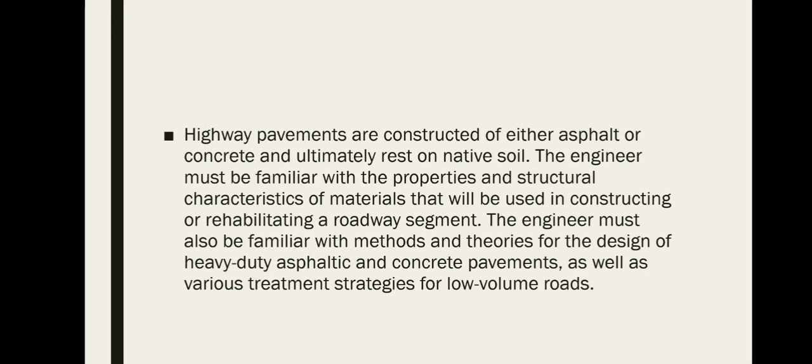Next is soil engineering for highway design. Highway engineers are interested in the basic engineering properties of soils because soils are used extensively in highway construction. Soil properties are of significant importance when a highway is to carry high traffic volumes with a large percentage of trucks. They are also important when high embankments are to be constructed and when the soil is to be strengthened and used as intermediate support for the highway pavement. Thus, several transportation agencies have developed detailed procedures for investigating soil material used in highway construction.

So in highway design, soil plays a vital role before constructing a highway pavement. Regarding soil, it's important to know its properties because there are many types of soil - loamy soil, sandy soil, or whatever type of soil - because these types of soil vary in how they are handled before going into our project.

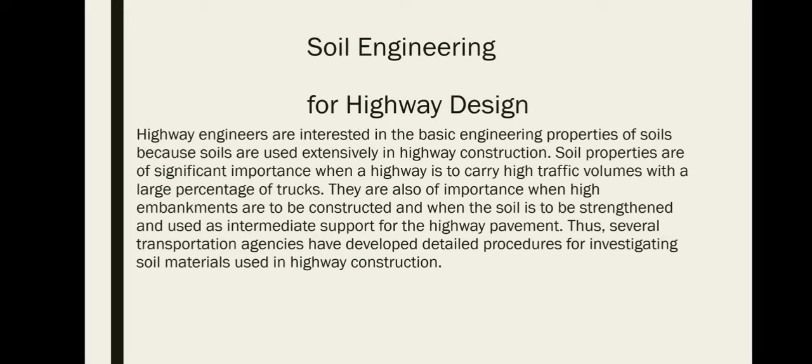Also, highway engineers need to know how to deal with different types of soil. So, soil characteristics, origin and formation of soils. Soil can be defined from the civil engineering point of view as the loose mass of mineral and organic materials that cover the solid crust of granitic and basaltic rocks of the earth.

Soil is mainly formed by weathering and other geologic processes. They occur on the surface of solid rock or near the surface of the earth. Weathering is the result of physical and chemical action, mainly due to atmospheric factors that change the structure and composition of rocks. Weathering occurs through physical or chemical means, and so on and so forth. So weathering has two types: physical weathering or chemical weathering.

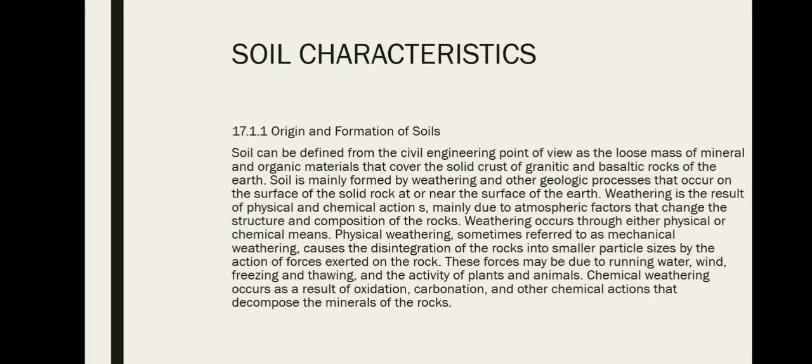Why is weathering relevant to our topic? Because it is important to know the soil characteristics. We don't need to specialize in it, but it's more important to know that soil comes from weathering, for example chemical or physical weathering. It also plays a role in determining soil characteristics.

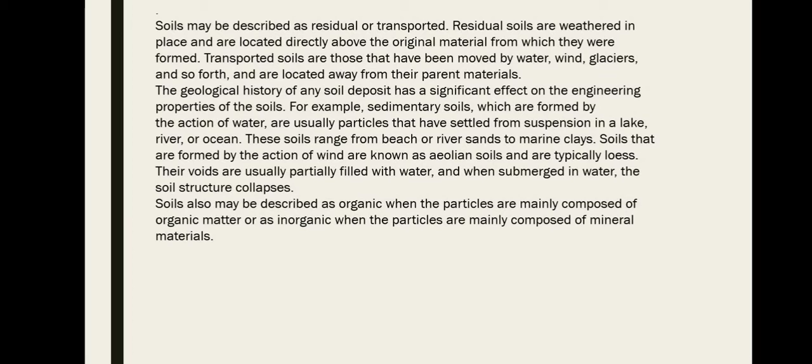For example, sedimentary soils are formed by the action of water, and usually particles have settled from suspension in a lake, river, or ocean. These soils range from beach or river sands to marine clays. Soils that form by the action of winds are known as aeolian soils and are typically loess. Their voids are usually partially filled with water and when submerged in water, the soil structure collapses. Soils may be described as organic when the particles are mainly composed of organic matter, or as inorganic when the particles are mainly composed of mineral materials.

Surface texture: the texture of soil can be described in terms of its appearance, which depends mainly on the shapes, size, and distribution of soil particles in the soil mass. Soil consisting mainly of silts and clays with very small particle sizes are known as fine textured soils, whereas soils consisting mainly of sands and gravel with much larger particles are known as coarse textured soils. The individual particles of fine textured soils are usually invisible to the naked eye, whereas those of coarse textured soils are visible to the naked eye.

It will be seen later in this chapter that the engineering properties of soil relate to its texture. For example, the presence of water in fine textured soils results in a significant reduction in strength, whereas this does not happen with coarse textured soils. Soils can therefore be divided into two main categories based on their texture.

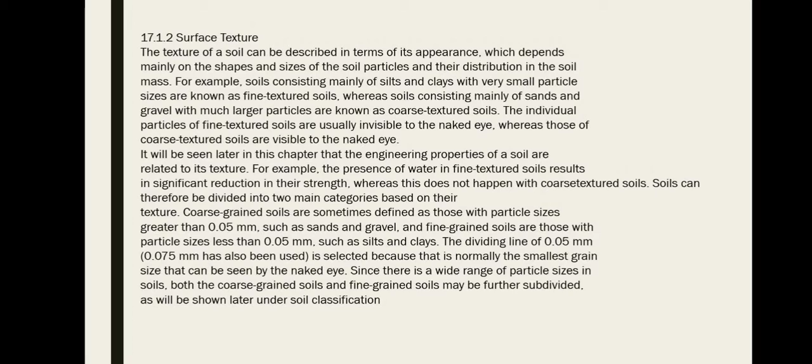In surface texture we have a formula for D, the maximum diameter of particles in suspension at depth. Eta means the coefficient of viscosity of the suspending medium. Gamma S is the unit weight of soil particles, and gamma W is the unit weight of water. So the formula is D equals the square root of 18 eta over (gamma S minus gamma W) times (gamma over T).

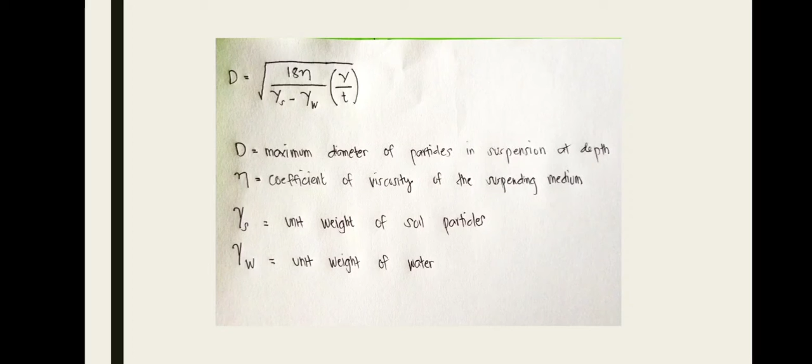Basic engineering properties of soils.

The highway engineer must be familiar with those basic engineering properties of soils that influence their behavior when subjected to external loads. Determining how a specific soil deposit will behave when subjected to external loads is rather complicated because soil deposits may have heterogeneous properties.

The highway engineer must always keep in mind that the behavior of any soil depends on the condition of that soil at the time it is being tested.

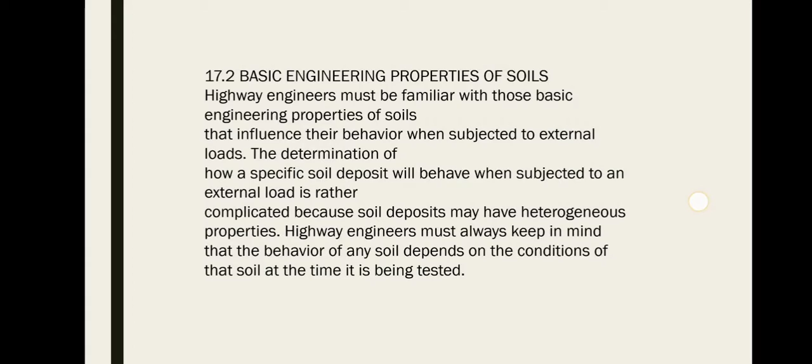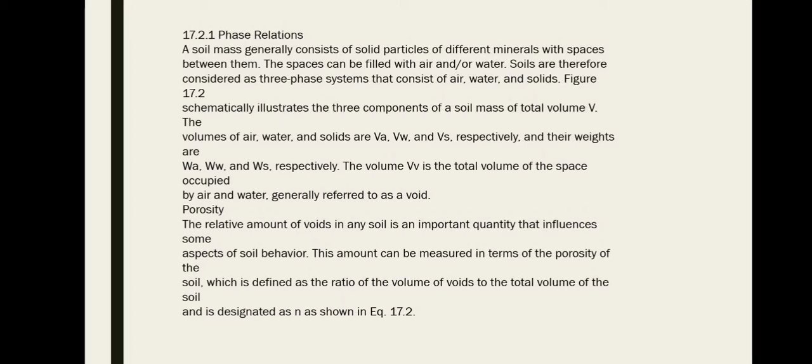Porosity: the relative amount of voids in soil is an important quantity that influences some aspects of behavior. We will now see the formula for porosity and other components of soil in order to get the mass.

To get porosity: N equals VV, the volume of voids, over V, the total volume. To get void ratio: E equals volume of voids over volume of solids. So void ratio is the amount of voids, also measured as the ratio of the volume of voids to the volume of solids, designated as E.

So that's the void ratio. Now we see in the illustration the air, water, and solid. On the left side is W, the weight, and on the right side is the total volume.

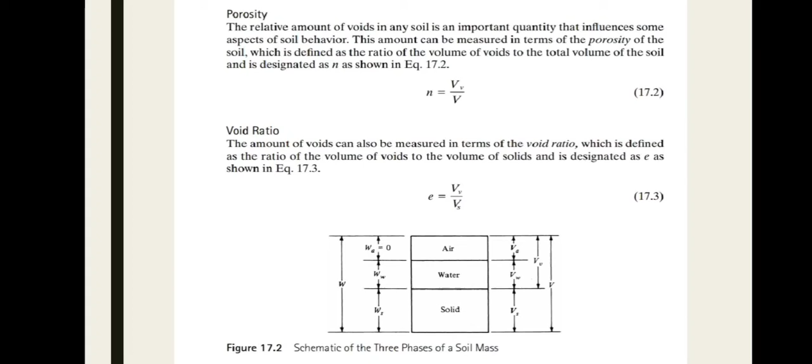Moisture content: the quantity of water in a soil mass is expressed in terms of the moisture content, defined as the ratio of the weight of water WW in the soil mass to the oven dried weight of the soil WS, expressed as a percentage. It is given as W equals WW over WS times 100, to get the moisture content.

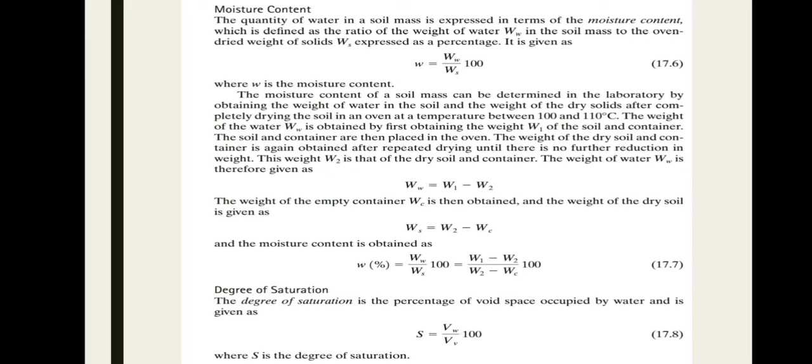Next is the degree of saturation. The degree of saturation is the percentage of voids space occupied by water, given as S equals VW over VV times 100.

Dry density: to get the density of soil, a very useful soil property for highway engineers, is the ratio on the mass side of the phase diagram and the volumetric side. To get total density or bulk density, it is the ratio of the weight of a given sample of soil to its volume: gamma equals W over V equals (WS plus WW) over (VS plus VW plus VA). Weight of air is negligible.

Dry density is the density of the soil with water removed. It is given as gamma D equals WS over V equals WS over (VS plus VW plus VA), which equals gamma over (1 plus W).

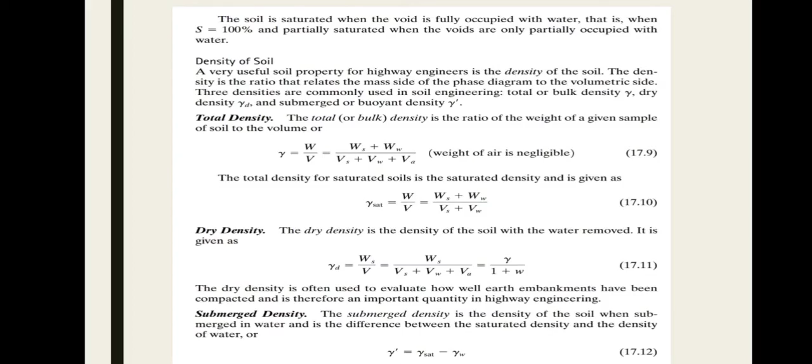So next is the Atterberg limits. Clay soil with very low moisture content will be in the form of solids. As the water content increases, the solid soil gradually becomes plastic, meaning the soil can easily be molded into different shapes without breaking up. Continuous increase of water content will eventually bring the soil to a state where it flows as a viscous liquid. The stiffness or consistency of the soil at any time depends on the state the soil is in, which in turn depends on the amount of water present in the soil. The water content levels at which soil changes from one state to another are the Atterberg limits.

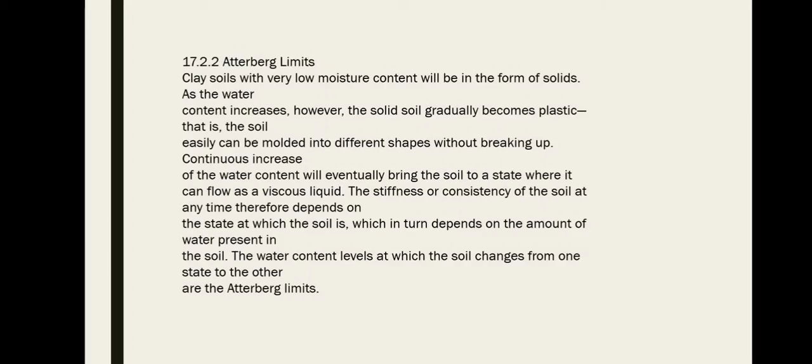So the shrinkage limit, or SL: when a saturated soil is slowly dried, the volume shrinks but the soil continues to contain moisture. Continuous drying of the soil, however, will lead to a moisture content at which further drying will not result in additional shrinkage. The volume of the soil will stay constant, and further drying will be accompanied by air entering the voids. The moisture content at which this occurs is the shrinkage limit, or SL, of the soil.

So next is the plastic limit. The plastic limit, or PL, is defined as the moisture content at which soil crumbles when rolled down to a diameter of 1/8 of an inch. When moisture content is higher than PL, soil can be rolled down to diameters less than 1/8 of an inch. When moisture content is lower than PL, soil crumbles before it can be rolled to 1/8 inch diameter.

Liquid limit. The liquid limit, or LL, is defined as the moisture content at which soil will flow and close a groove of 1/2 inch within it after the standard LL equipment has been dropped 25 times. The equipment used for LL determination is shown in Figure 17.5.

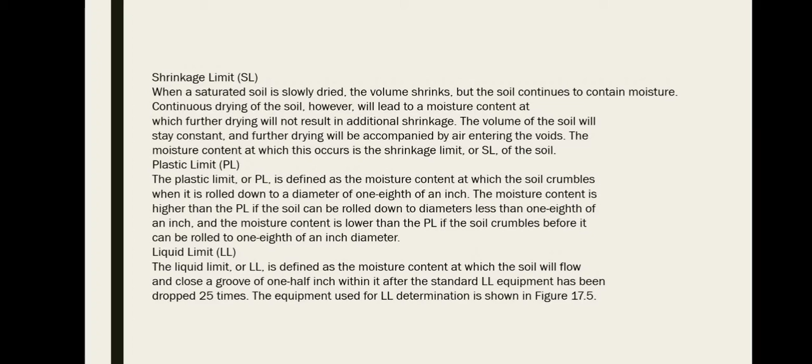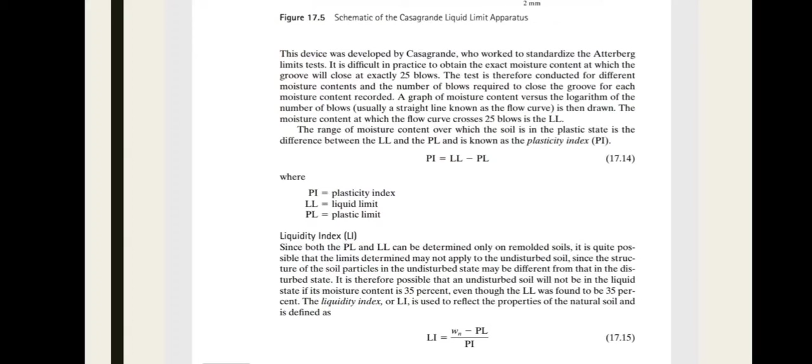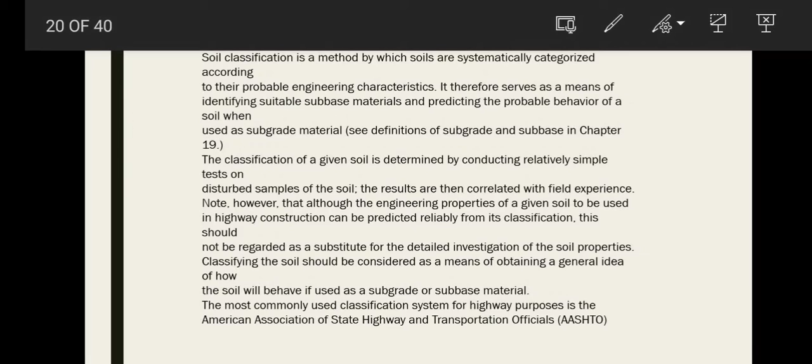The formula for LI, or liquidity index, is W minus the plastic limit, over the plasticity index. So LI is the liquidity index, and W is the natural moisture content of the soil.

So permeability: the permeability of soil is the property that describes how water flows through the soil. It is usually given in terms of the coefficient of permeability K, which is the constant of proportionality of the relationship, where U is the velocity of water in the soil, I is the hydraulic gradient, H over L is the head loss H per unit length, and K is the coefficient of permeability.

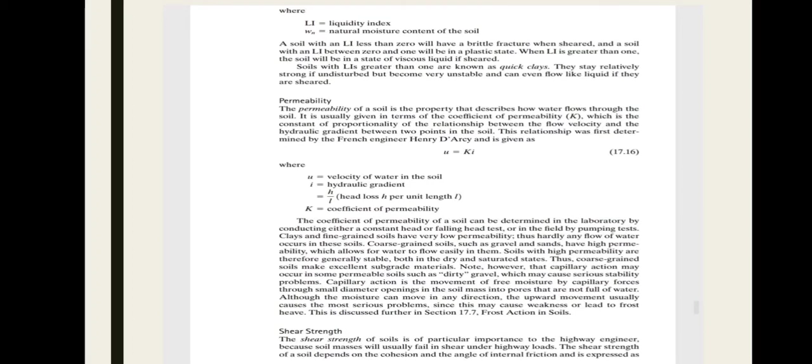Also, shear strength: the shear strength of soil is of particular importance to the highway engineer because soil masses will usually fail in shear under highway loads. The shear strength of soil depends on the cohesion and angle of internal friction.

Standard specification for transportation materials and methods of sampling and testing.

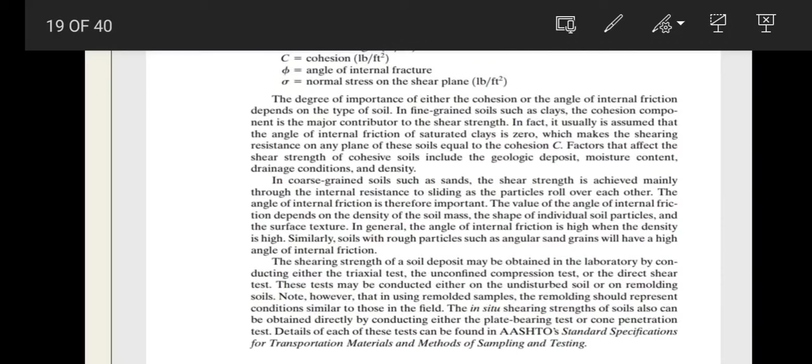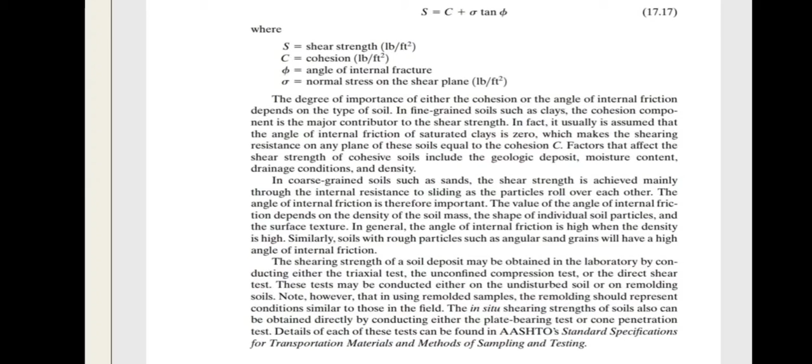So S is shear strength, C is cohesion, phi is the angle of internal friction, and sigma is the normal stress on the shear plane.

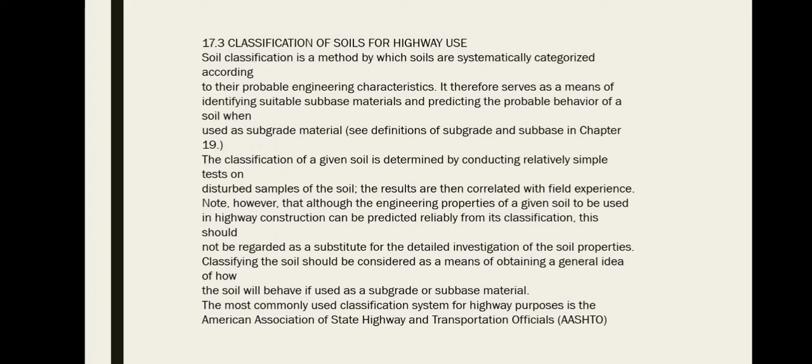The classification of a given soil is determined by conducting relatively simple tests on disturbed samples of the soil. The results are correlated with field experience. Note, however, that although the engineering properties of a given soil to be used in highway construction can be predicted reliably from its classification, this should not be regarded as a substitute for detailed investigation of the soil properties. Classifying the soil should be considered as a means of obtaining a general idea of how the soil will behave if used as a subgrade or subbase material.

So next is the Unified Soil Classification System, or USCS. The original USCS system was developed during World War II for use in airfield construction. The system has been modified several times to obtain the current version, which can also be applied to other types of construction such as dams and foundations.

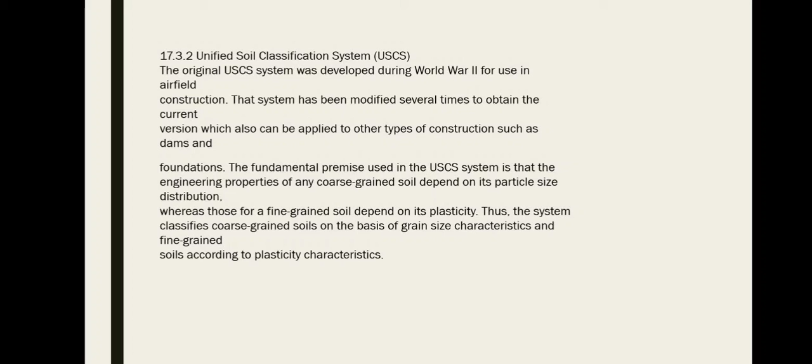The fundamental premise used in the USCS system is that the engineering properties of any coarse grained soil depend on particle size distribution, whereas those of fine grained soil depend on its plasticity. Thus, the system classifies coarse grained soils on the basis of grain size characteristics and fine grained soils according to plasticity characteristics. This table shows the USCS definition of particle sizes used in soil engineering for highway design.

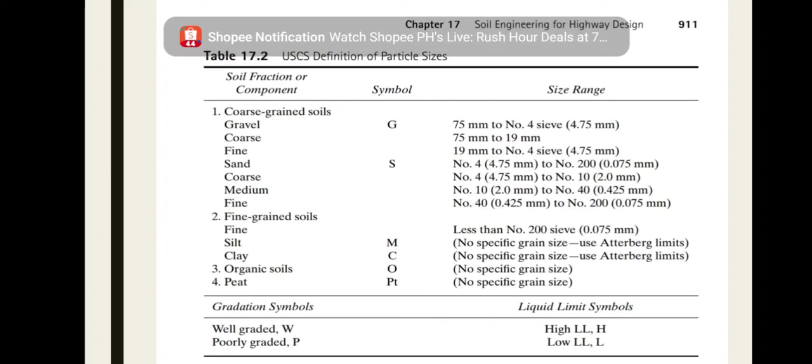First is the soil fraction component. Second is the symbol and size range. Coarse grain soils include gravel and sand, fine to coarse, medium to fine, with symbols G and S and their size ranges. For example, for gravel, the size range is 75 mm down to the number 4 sieve, which is 4.75 mm, and so on.

For fine grain soils, we have silt and clay. For example, silt has a symbol of M, and clay is C. For silt, no specific grain size, use Atterberg limits. Fine grain soils are classified as less than the number 200 sieve, which is 0.075 mm.

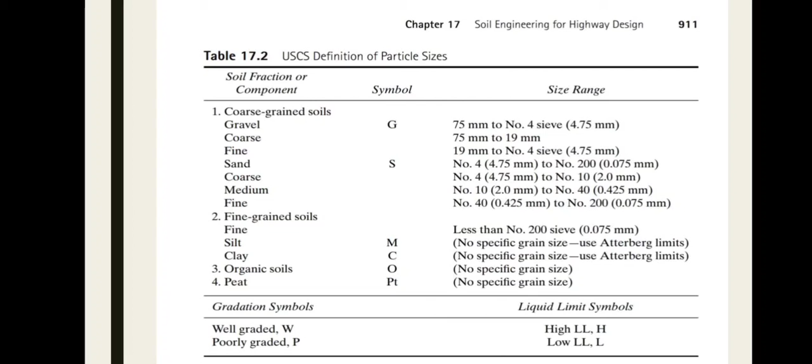On the left are the gradation symbols, and on the right are the liquid limit symbols. Well graded is W, and poorly graded is P.